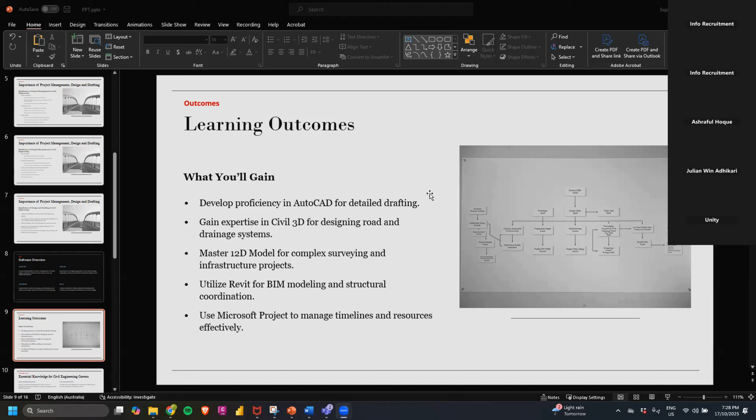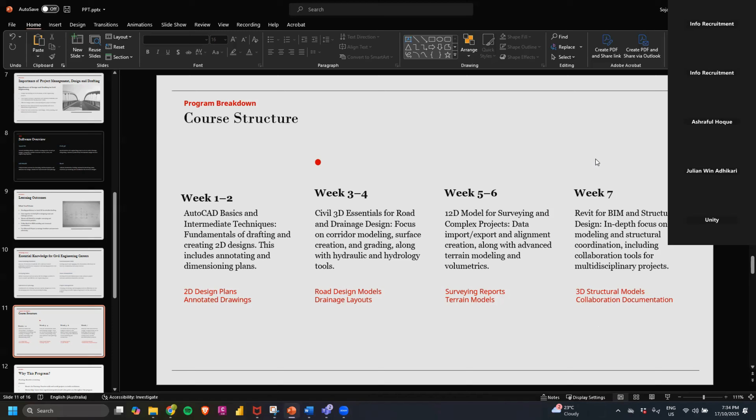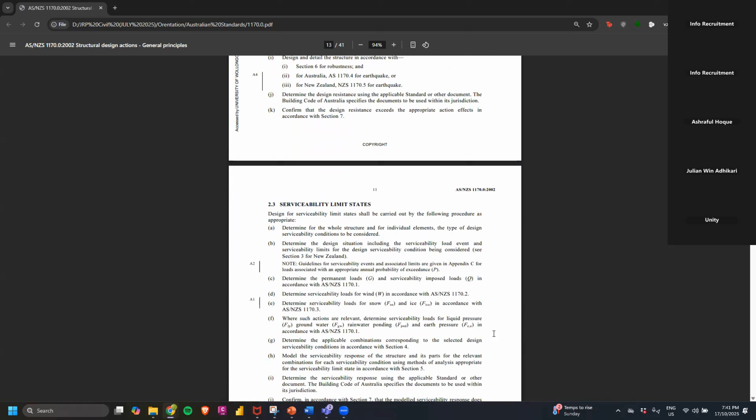All right, so that's one of the examples there. I'll show you some other things - just give me a moment.

Okay, I'll show you a sample drawing. This is a structural drawing. The first page is just the notes - obviously there will be a cover page before that, but this is just the general notes page. These are all general notes, and basically you refer to these for most of the stuff.

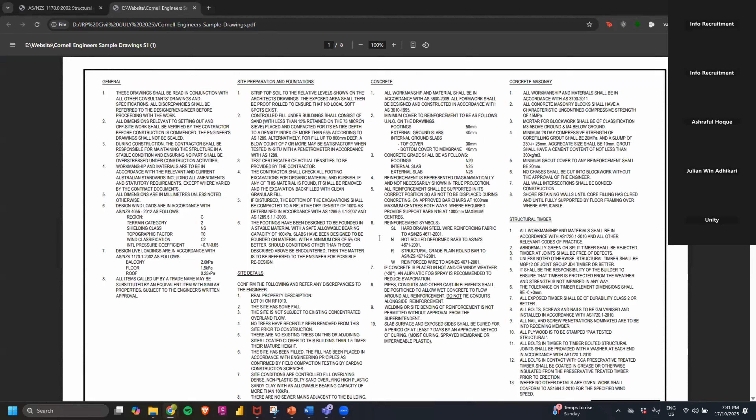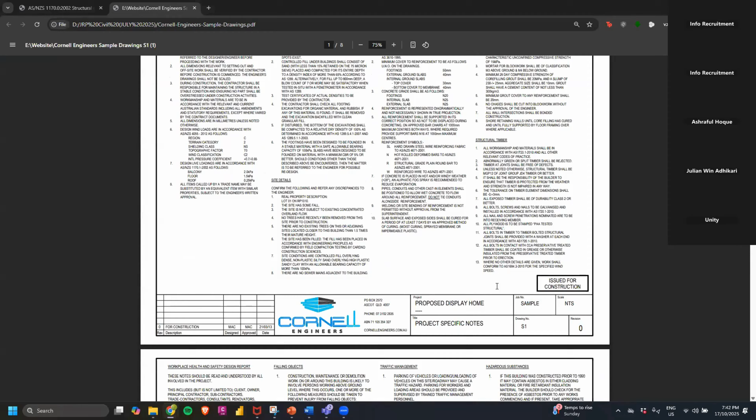How to proceed with design - how they proceeded with designs, how they proceeded with all these construction processes and those kinds of things. So these are general notes, and this is putting in slab plans - you give information on what things are used here, putting in slabs, and these are typical details: where reinforcements go in, how much thickness, the details of all those, and what a lap length is, and those kinds of things.

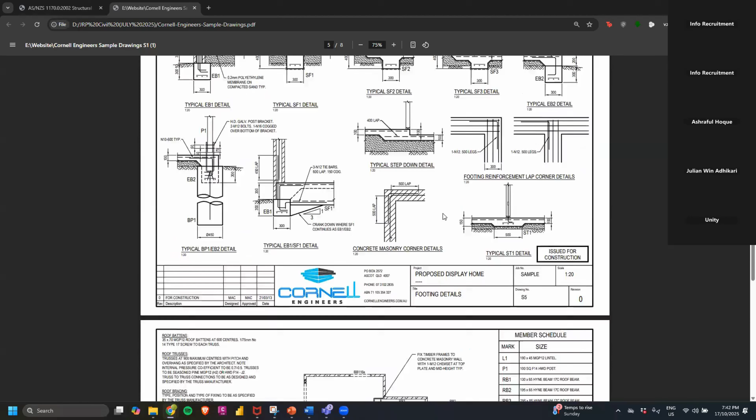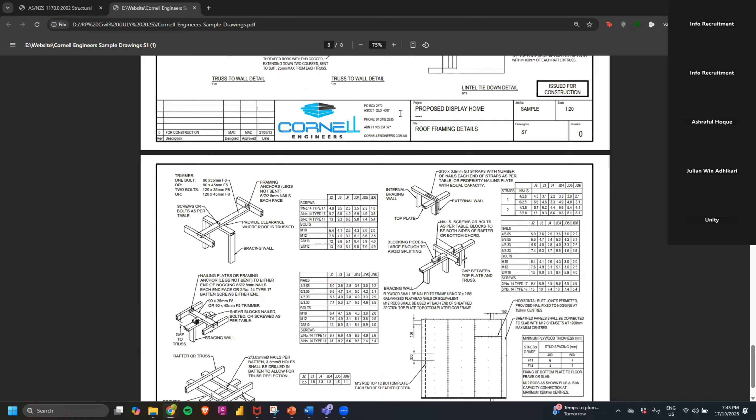And this is the same thing - so this is bracing details, right? So what are the things you use, the sizes of the members, the screws or bolts, where you use that - all that information. So this is just an example there.

And I'll show you another example as well - just give me one moment. I don't want to bore you guys with all this theoretical knowledge, but I just want to quickly show you how plans look like and what things are required. Just give me one moment - where did I keep going?

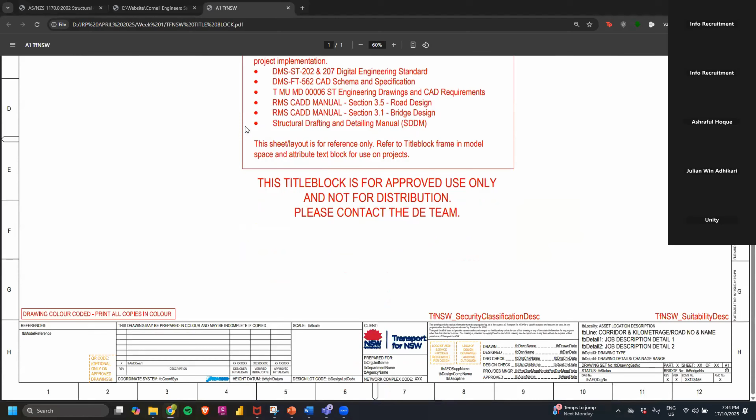This is a title block, which you'll be doing in AutoCAD. So you have to create a title block like this, similar to these title blocks here. These are really important in drafting, so we'll be learning how to create that title block in AutoCAD, and what the components are.

I'll show you another one. That one.

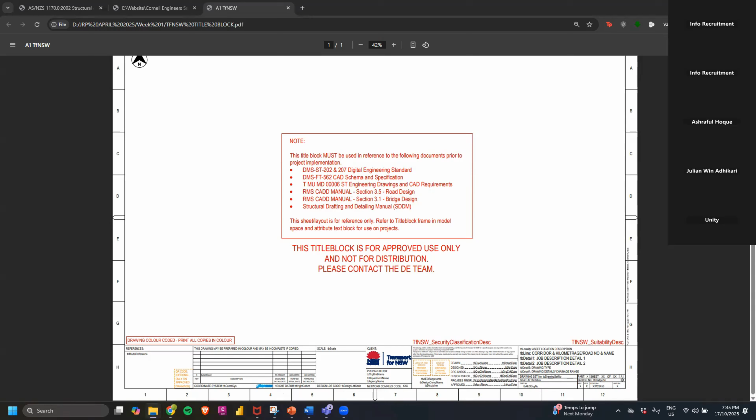So you'll also be using AutoCAD to create these typical details, okay, details of these. This is a pretty easy one, just to understand how things work.

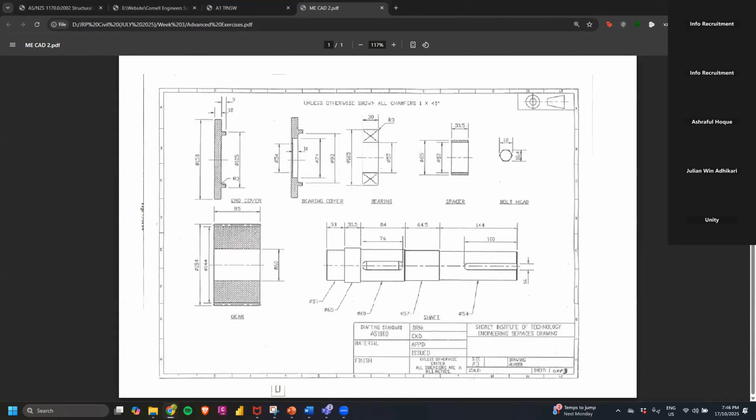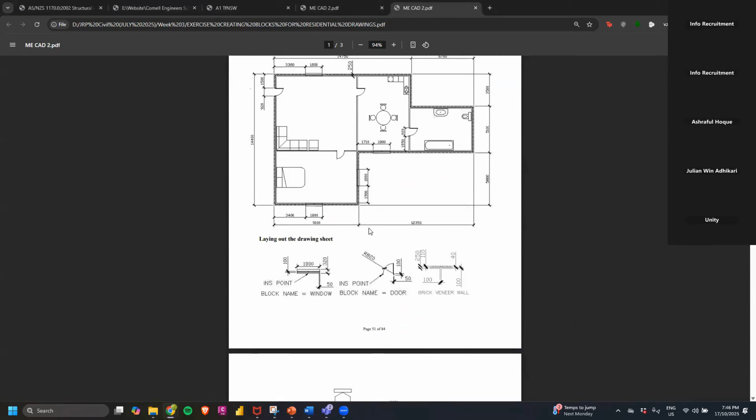I'll just show you here. Like typical details, all the dimensions are given here. And same here, creating blocks like a simple house plan. This exercise will be there as well, and you'll be using these details to create them in AutoCAD. Yeah, and these block details you'll be creating as well, with all the dimensions given here just to understand how AutoCAD works. Maybe most of you might be familiar, but we'll be learning about that.

And then... that one, sorry. I'll show you another one. Oh, it's nearly time there, but just give me one moment.

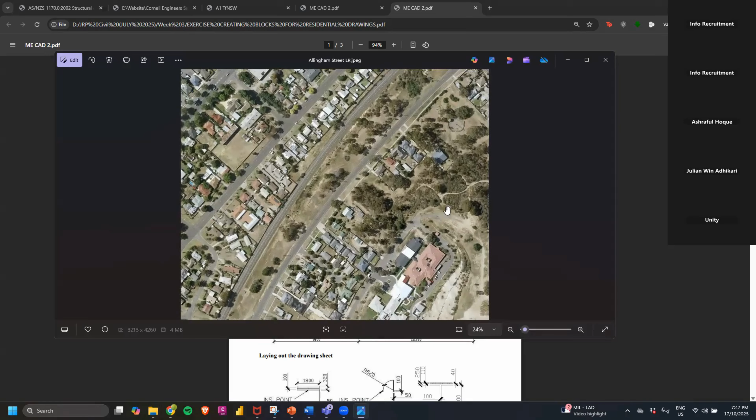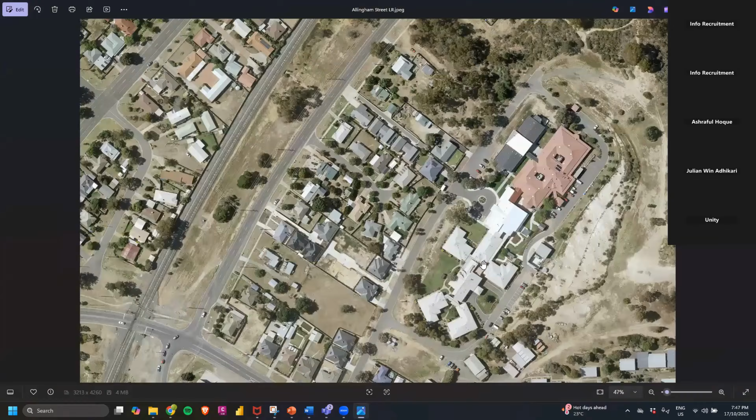I'll also show you how you can import aerial images into your software so that you can design in the right locations, so the surveying part comes into play. This is an aerial image which you can import into your software to design properly. It helps in planning, like where you want to create roads, where the houses are, how many driveways there are, what lane sizes you need, especially for roads, and even drainage. I'll show you how you can import these kinds of images there.

And then, more of that. Yeah, just want to show you one more, give me one moment. I think I've sent here one last plan, and then that's about it.

So this is one of the projects we'll be doing in Revit. All the dimensions are here, showing how to create these foundations, how to create the walls, the sizes of the walls and the roof, all those kinds of things. We'll be dealing with these things on Revit, and this is a simple structure which I'll give to you guys. Probably we'll see which one's better, this or that, and then we'll look forward. I'll give you both just to practice, but we'll see which one we do depending on your level of expertise, like how many people know about Revit.

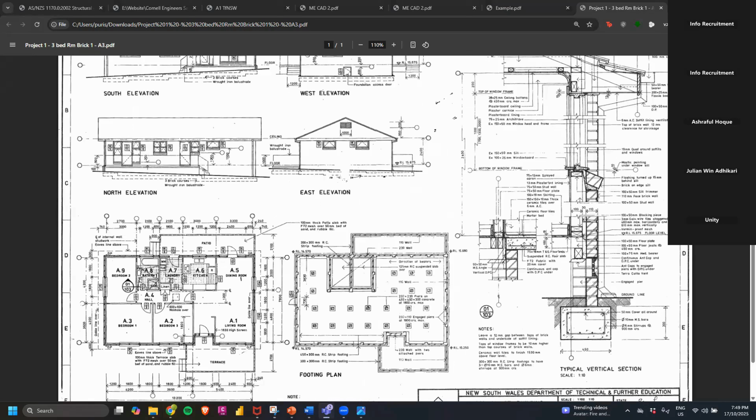I think we're nearly out of time, but I just wanted to show you a couple of things before we go. I feel that's all for now. Later down the track, you'll learn more about other stuff, how to import survey data, how to design, how to draft, and all those kinds of things. I think I'll just stop here and pass it to Neha for questions, so if anyone has any questions regarding this, we can talk about that.

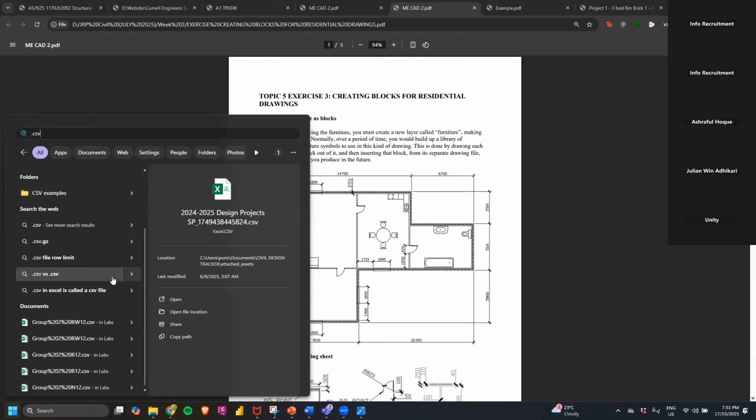So I have survey data which you import into software, and then from there you create alignments. I don't have a project like that here, because that's my own personal project, so I haven't mentioned all these details there. But I'll show you how you can import data, the basic understanding of Civil 3D itself, how to import and create digital terrain models, and then from there how to create alignments, and depending on the template of the road, the sizes of the road, how you can create that and batter them to the existing ground. That's practical knowledge.

I might have a snapshot, just give me one moment. I'll quickly show you that so you have an idea of how that looks like. Just give me a second.

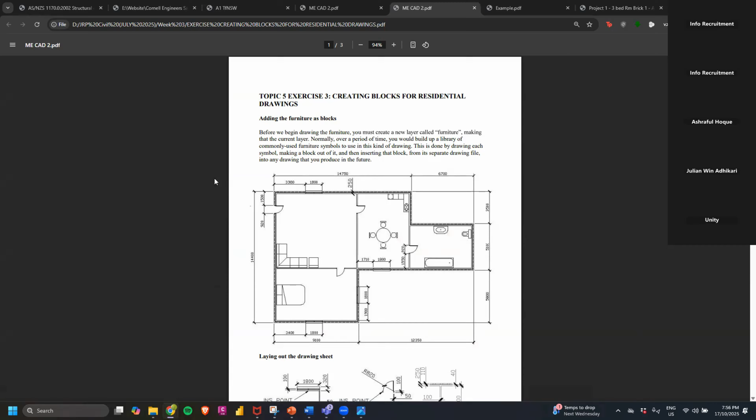So that's why I won't have any information like these. But what I have is survey data and the project scope, which we can use and refer to the guidelines to design accordingly, which is done practically.

So yeah, I would have shown you one of the projects, but it takes a while to load, so that's why I don't have it here. I don't have it on this laptop, because I could have shown you in Civil 3D, but yeah, no.

I had a draft plans. Okay, probably I'll find it out. Just give me one moment, because that makes sense. I feel that'll make sense if I show you that. Just give me one moment. I think I sent some files to someone. Files. What happened?

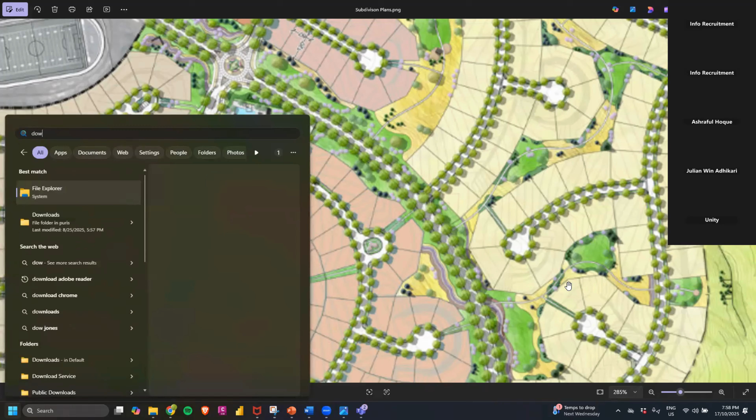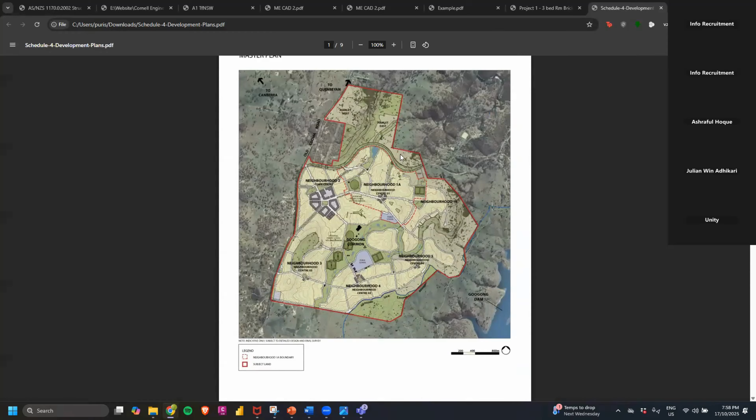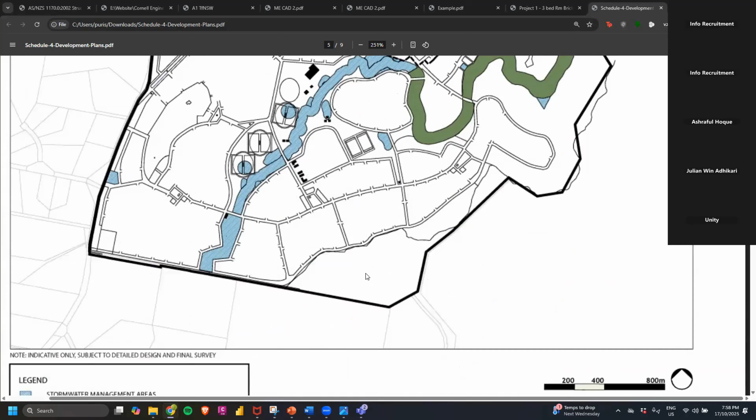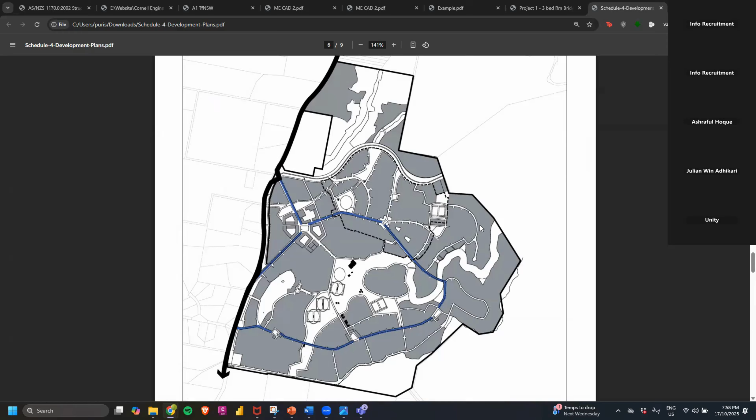So for example, like these kind of things, okay, this is a report. So this is a subdivision plan, and basically you'll see information like here. This is a planning phase. And then what you do is you have survey data of these, and you have to create according to the planning design. Obviously there will be differences, it won't be exactly that because you have to follow standards and all. But yeah, basically you follow these planning things and then you design. So here you can see how many roads are there, how you interconnect the roads, all those kinds of things, and you design accordingly.

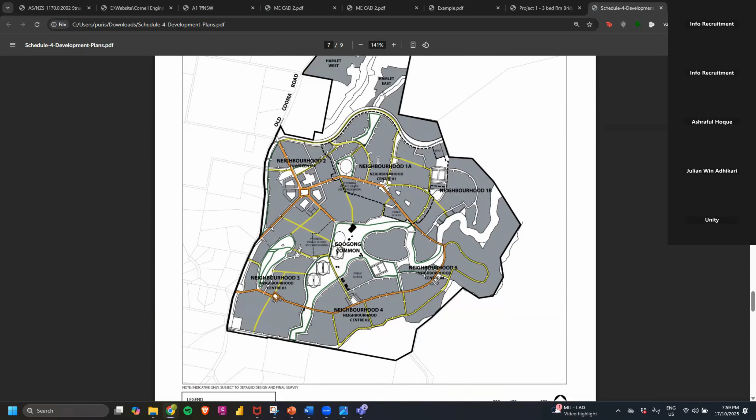Maybe it'll shift a bit, the curves might be a bit different depending on the standards. But yeah, basically you have to design kind of like this is a subdivision, okay? And road design works like that, right?

So this is one of them, and another one. Let me just find out. So... downloads all.

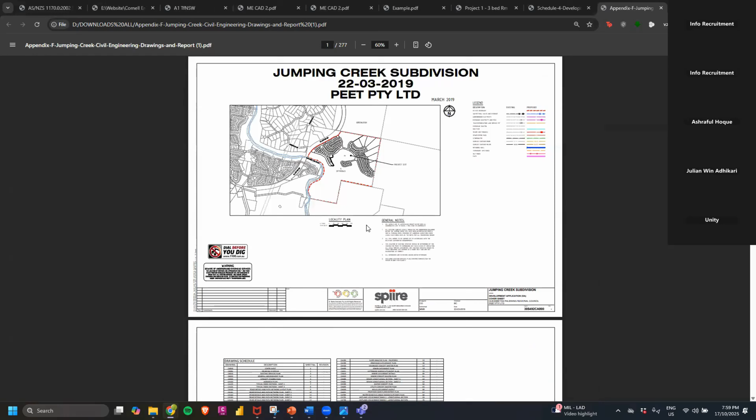Okay, is that the one? Okay, this is how it looks like, right? So basically, this is a subdivision plan. So this is a cover page, and then you have the existing information here, like all these contour lines and all.

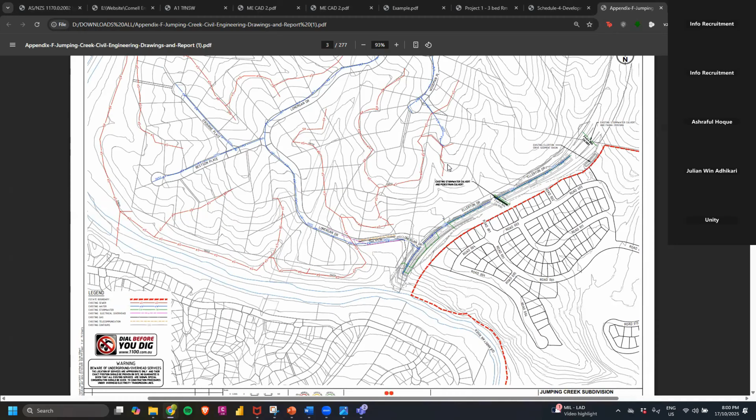So basically, you create a digital model which creates these contours where you can get the elevations - X, Y, and Z coordinates - and then you plan it out, see here. So these are all designed, right? There are alignments here, and you design this.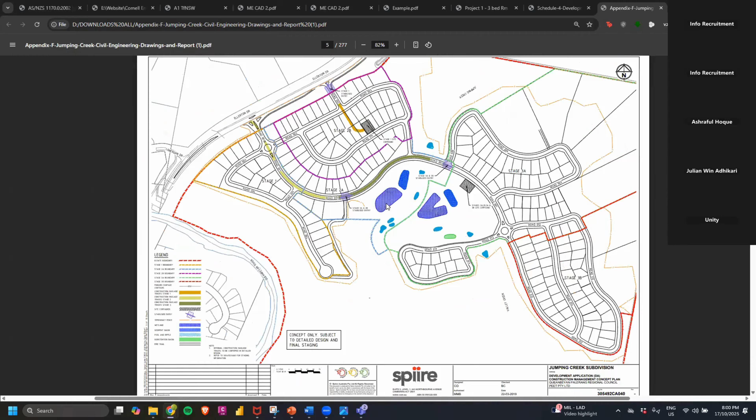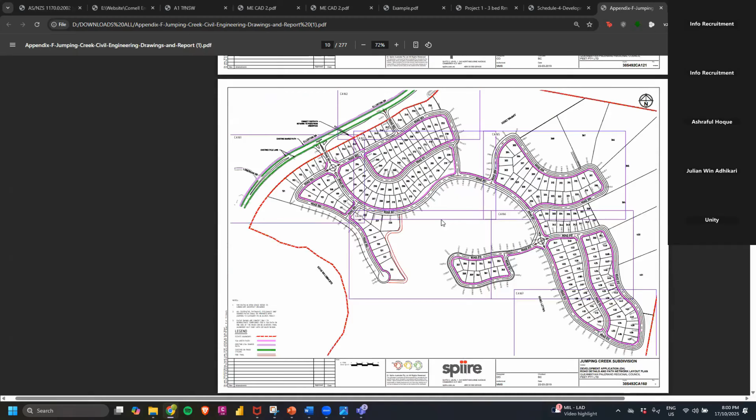And then you create a network, okay? And what happens is you have to give a typical section of how the road looks like - what sizes, what's the traffic lane, what's the road reserve, what are the curb types, where are the sewer, water, storm water, and the verge sizes as well, NBNs, all those kinds of things. And then after that, there'll be long sections and cross sections.

I'll show you just below. So this is the cut and fill plan. Basically after you design, according to the existing ground, these are gradings like how much you need to cut - you can see the depths, how much you need to cut and how much you need to fill. Plus is fill, minus is cut. So basically you have to balance that.

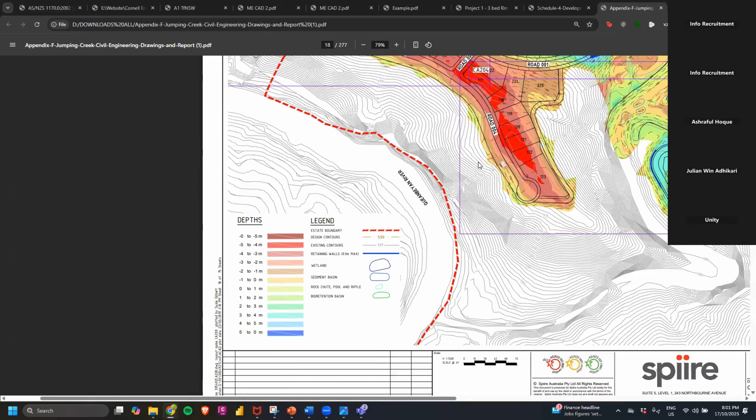And then after that, moving on - just give me a sec - I'll show you long sections and cross sections. So basically you have to design. This dotted line is the existing ground, and this straight, continuous line is the design. So this road is just going...

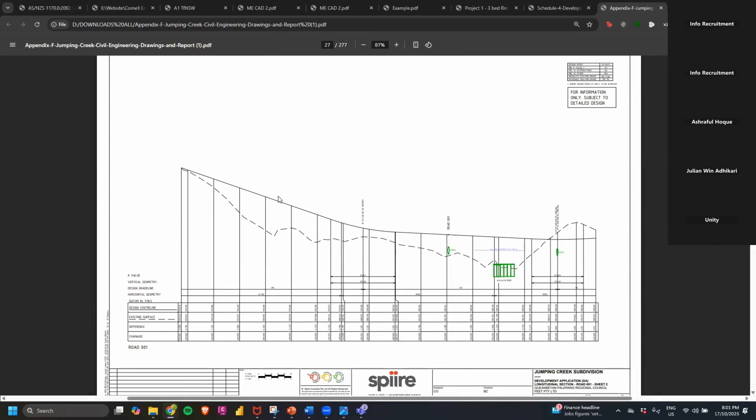Downhill and downhill, and here, and the next page is there as well, so you might continue from here. So chainage 63, yeah, it continues uphill - it goes downhill there, and then after that it goes uphill. So basically you design in that way according to standards.

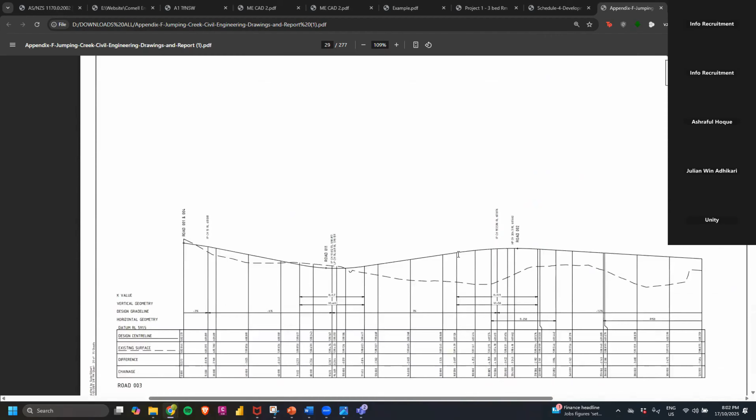And same goes here - these are different roads. So road 3, this is road 1, that's road 1, and this is road 2. There are others as well, similarly - different roads. We won't be doing all of the roads; we'll be doing one road which is similar, and you use the same concept to do other roads as well.

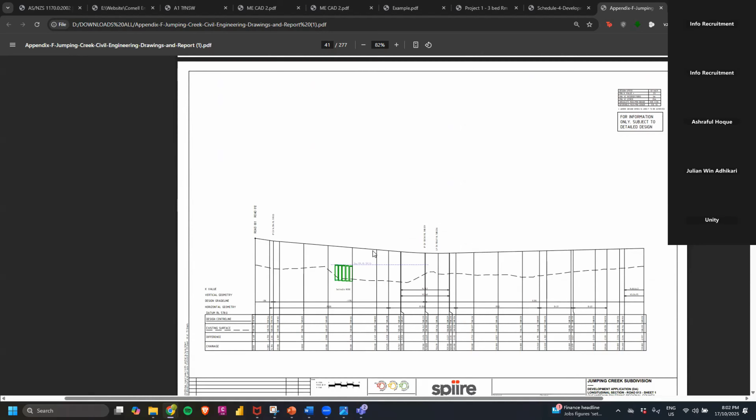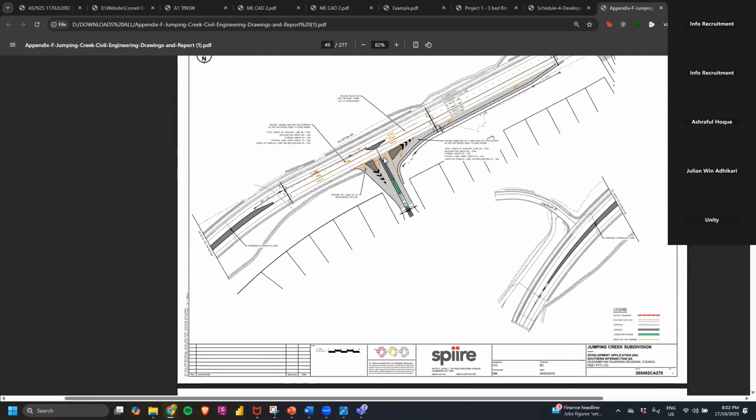And then these are line marking plans, so you want to show what line markings will be there - you have to design the line markings as well. This is a set of plans basically. We won't go through all of them, but we'll go through most of them. And then there might be drainage plans as well - I'll show you quickly.

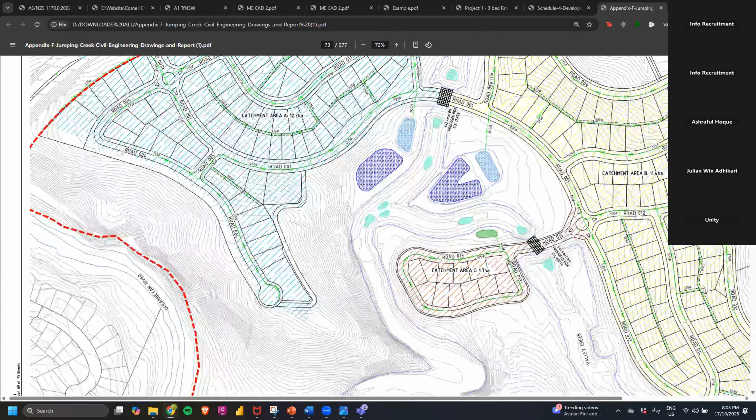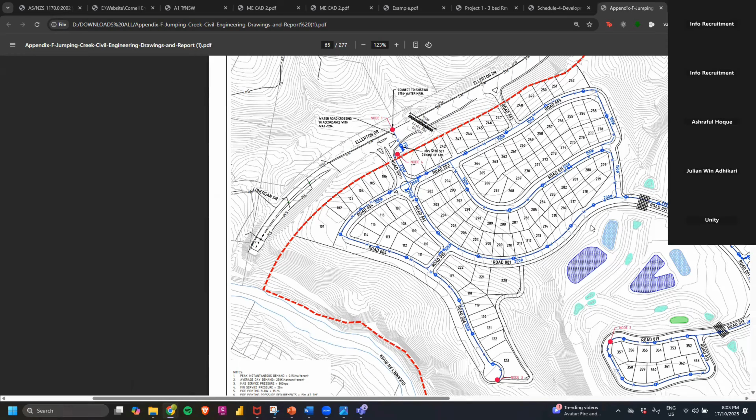Okay, so this is a water network. Basically you connect to existing, and then from there onwards you design it so that it provides network for the whole lots - every lot has access to these water lines. So basically you design in such a way, and also according to standards. This is horizontal and there will be vertical as well. We'll be doing those kinds of things, and we won't have any plans - we have to create the plans. All right, hope that answers your question.

Okay, yeah. And you also talked about teaching how to install the softwares - so how do we get access to the softwares? Are you going to provide the software? Yes, I'll show you how you can get the access there, and then we can move forward. Okay, and are they softwares that we have to pay for? Yeah, some of them, yes, but not all of them - you don't have to pay. I'll show you how you can get it. All right, yeah, all good.

I think there was a couple of questions here. I think we already, after 8, but thanks for staying back. We'll just answer some of the questions and then we'll see if any questions are there. Just give me one moment. So is there a week discussion about project management like scheduling using software, and AS basic building standards?

Yes, 100%. So week 1 and 2 is basically about understanding these. Week 1 is about discussing what are the Australian standards mostly used in Australia - I'll be giving out notes as well on the mostly used Australian standards, and where you can find them, like if you have to pay, or if you're a student, how you can get it for free. I'll explain about that. And National Construction Code - that's the Building Code of Australia, same as National Construction Code - we'll be discussing that. So week 1 and 2 is basically about AutoCAD and these kinds of things.

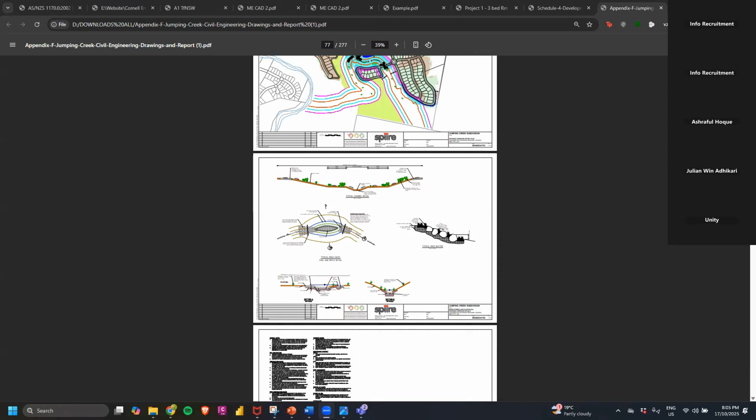Yeah, all good. I think some more questions were there. Let me just check. I think that's about it.

I'm a civil engineering student. Is it okay to start the class or should I wait? So you're a second year civil engineering student. To be honest, I wish I started earlier, because you'll get an understanding of how to apply this theoretical knowledge into practical, so you'll get that exposure. Otherwise you'll just be doing theory work and won't get anything. So it depends on you, how much you can cope with university assignments along with this. There's no right time or wrong time to start. Anyone can start, anyone can learn, because I'll be teaching from the beginning.

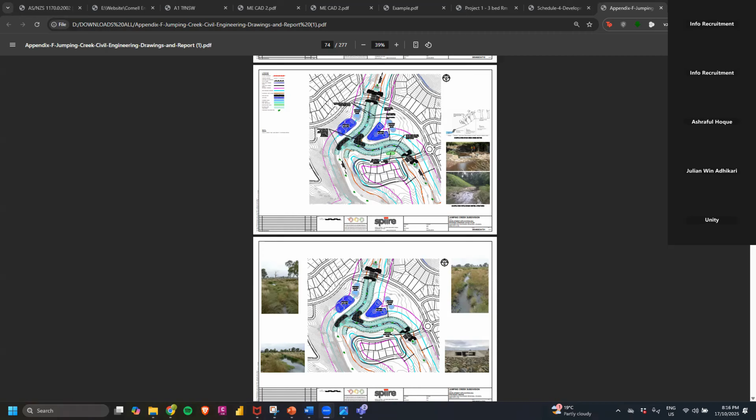If so, please let us know, because we are always looking to improve ourselves and make the experience better for all of our candidates. Is there anything you think could have been better, or something we could have talked about, or do you still have second thoughts when it comes to enrollment? Anybody?

I have a question about the class schedule. In case someone is busy or has to work at that time, how can the person take the classes?

You will get class recordings. We do have a fixed schedule, but if you somehow miss the designated schedule, you will be provided with the class recording.

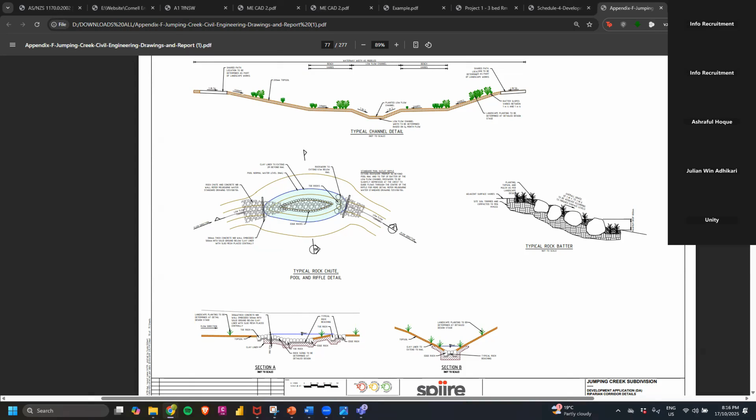Once you enroll with us, we basically use two softwares. One is Microsoft Teams and another is the academic management system. Microsoft Teams is free to download, it's basically like WhatsApp. Once you enroll, we will group you into a designated Microsoft Teams group. Over there you will get your trainer, your participants, everybody is going to be grouped. Any discussions or questions you can ask there, and interact with each other. Your trainer is also going to be there.

Next one is the academic management system. Once you enroll with us, we'll provide you with login details to the AMS portal. Once you log in and create your account, you can access all the resources, class recordings, course materials, everything is included there. So even if you miss a class, you can get the recording and do the revisions in your own time.

Got it, thanks. I would also like to know if it's possible to have a discussion with the trainer, not necessarily here, but another time, like on the phone, just to ask a few other questions that I have. Is that possible? Yes, definitely.

You can contact us, or I think it would be better if you leave your contact details, so maybe one of the trainers can get in touch with you directly later on as well. Oh yeah, yeah, that's good.

My experience with Info Recruitment, to simply put it, was great. They helped me with everything. Susan was great with the technical terms and teaching me the software. Sudhicha Gautam from Info Recruitment helped me with my career counseling, my resume, and my LinkedIn profile. They taught me how to apply, when to apply for jobs, and what positions to apply for. The overall experience was pretty great.

When it came to interviews, Sudhicha helped me with the management parts, and Susan was very helpful with the technical parts, as well as how to properly behave in an interview. I went to two interviews and got my job on the second one as a structural engineer. They were very helpful, and this class was very helpful as well.

Asked about his experience applying for jobs before, Rohan said he was doing his master's in engineering management in Brisbane as a part-time student, so he could only work part-time. He was applying for jobs pretty much as soon as he came to Australia, applying for engineering jobs here and there.